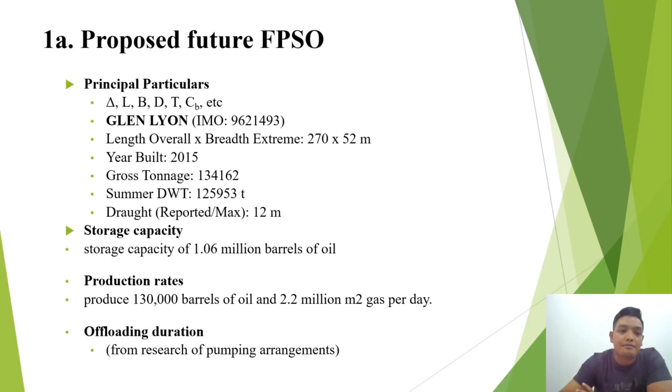Glen Lyon FPSO is operating on the field located 175 km west of Shetland Island in Block 204 and 205 of the UK continental shelf, with an export route for the charter tanker to the refinery or shore oil tank storage. The field, also known as the Schiehallion Field, was discovered in 1993. Recoverable oil reserves of Schiehallion are estimated to be between 450 to 600 million barrels.

The climate of the North Sea is strongly influenced by the inflow of water from the Atlantic Ocean and strong westerly wind. The North Sea is characterized by large variation in wind speed and direction, high level of cloud cover and high precipitation. There's a max temperature of 17 degrees and the lowest minimum temperature of 6 degrees in the North Sea.

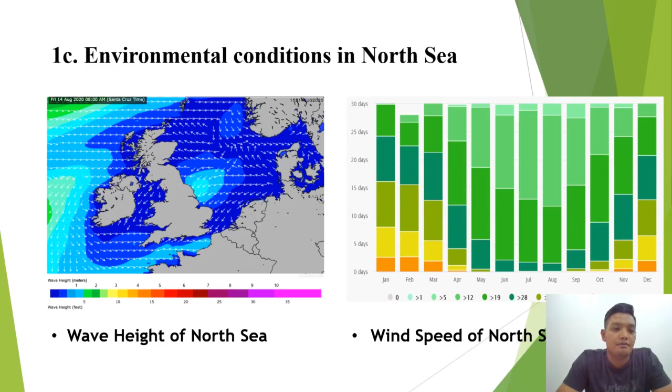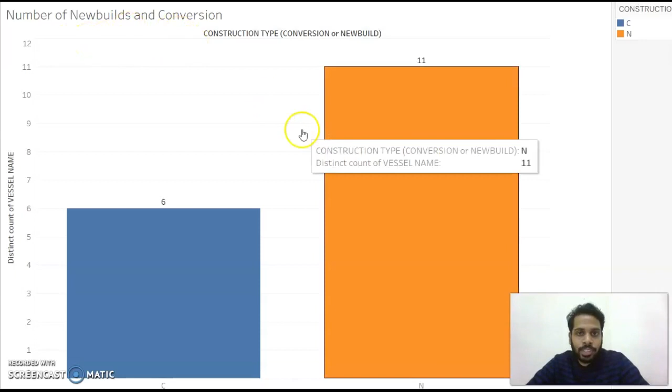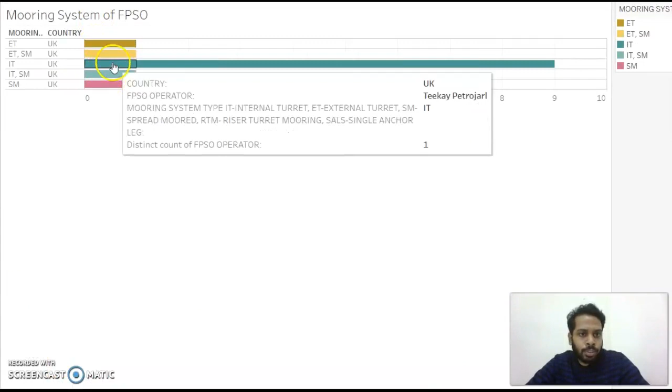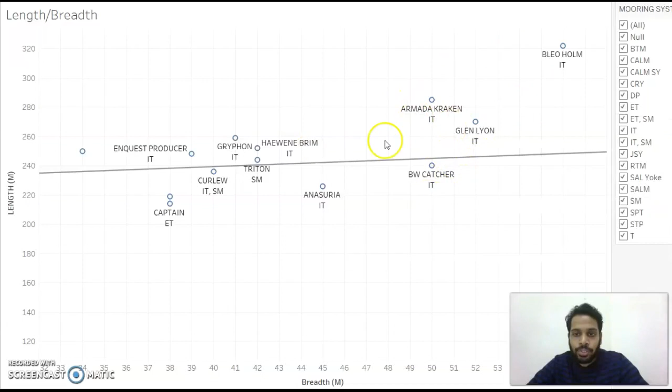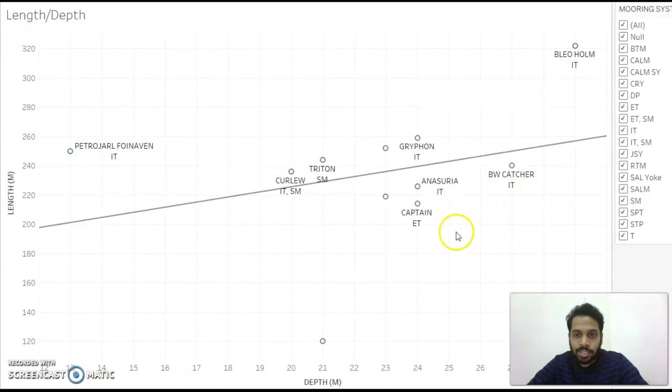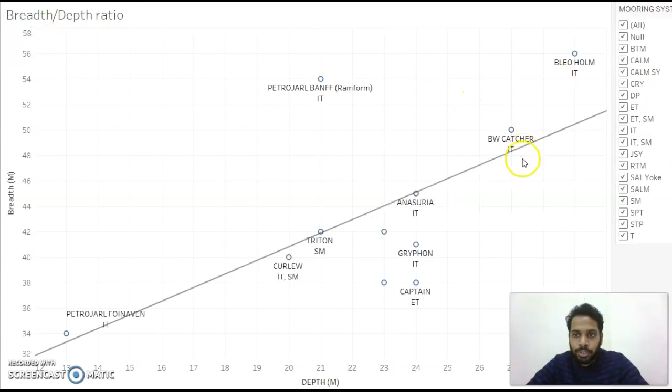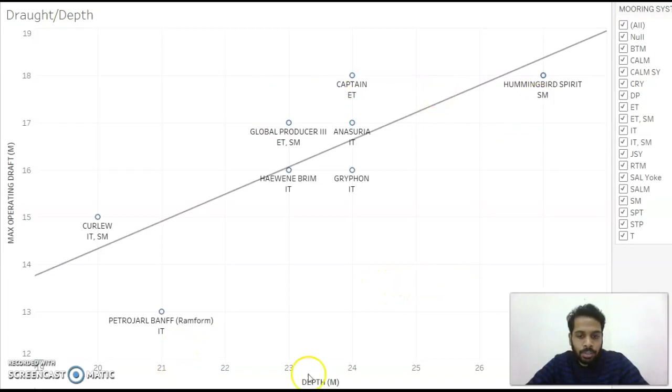Okay, this is the length and breadth of each FPSO in the North Sea, and this would be the length and depth of the FPSOs existing in the North Sea, and this is the breadth and depth ratio of the same FPSO ships. So the last one is the draft and depth of the FPSO ships existing in the North Sea. So that's all for this video.

Okay, thank you. Hi, today I want to present the criteria for the selection of floating production system, why we are choosing this monohull and why we need to carry out the model test. The monohull and semi-submersible come in water depth up to 3,000 meters, and the spar and tension leg platform are 1,200 meter depth and 1,500 meter depth.

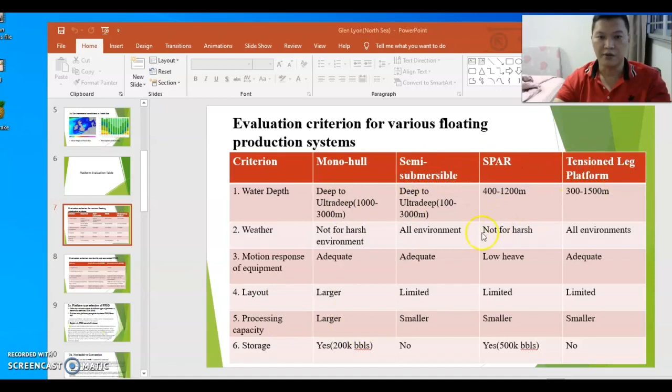Come to layout and processing capacity. The monohull is larger compared with the semi-submersible, spar and tension leg platform. The physical shape of future production facilities in the North Sea appears to be to a larger extent monohull. Floating production systems are intensively used nowadays for both shallow and deep water developments and are being actively considered in ultra-deep water applications greater than 1,500 meters. So the monohulls are the most popular concept, with larger production capacity, operating in deep to ultra-deep water and larger processing capacity.

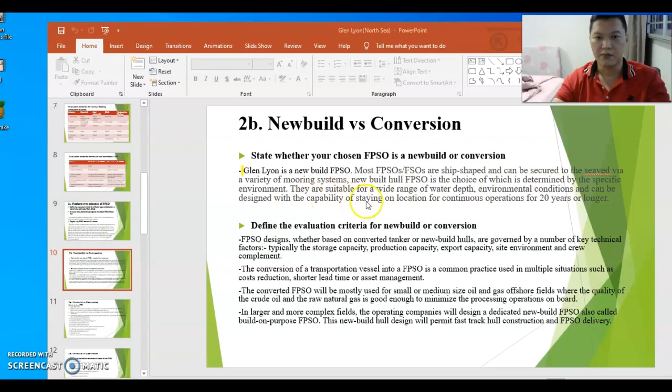The Glen Lyon is one of the new build hull FPSOs. Most FPSOs are ship-shaped and can be secured to the seabed via a variety of mooring systems. The new build hull FPSO is the choice, which is determined by the specific environment. They are suitable for a wide range of water depths and environmental conditions, and can be designed with the capability of staying on location for continuous operation for 20 years or longer.

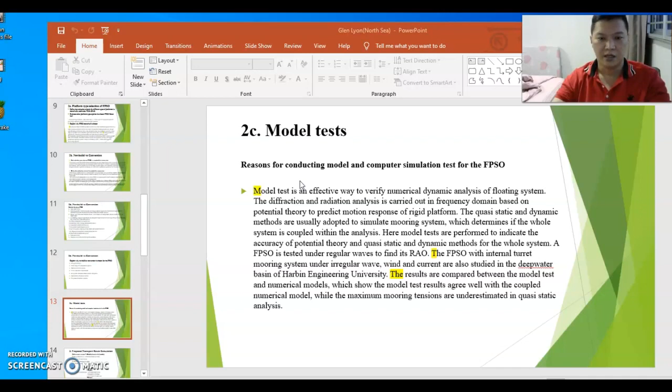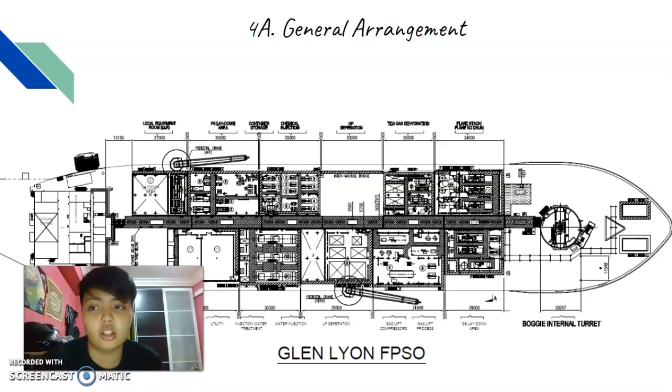This is a general arrangement for Glen Lyon FPSO. It is built to produce 130,000 barrels per day, and also is built to defy harsh environment. One thing special about this FPSO is using a bogie internal turret. As for proposed topside production, it has storage, and risers and wellheads are connected at the center point of the turret so that the ship can weathervane to withstand wind, waves, and current.

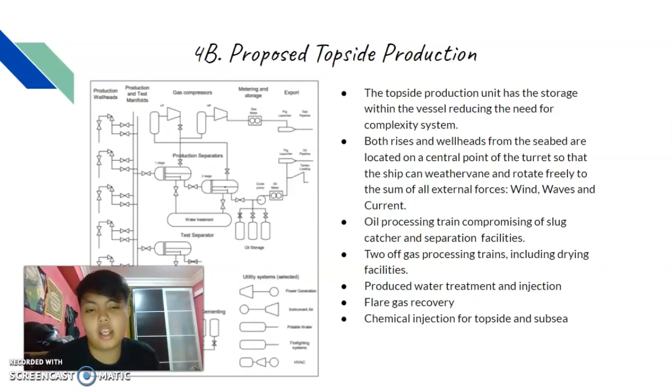They also have all the normal things that FPSOs have, such as an oil processing train comprising a slug catcher, drying facilities, produced water treatment, flare gas recovery, etc. For the offloading, the crude oil is transferred through pipeline onto the shuttle tanker storage and pipelines heading to Rotterdam, and gas is transported to Sullom Voe terminal via pipeline.

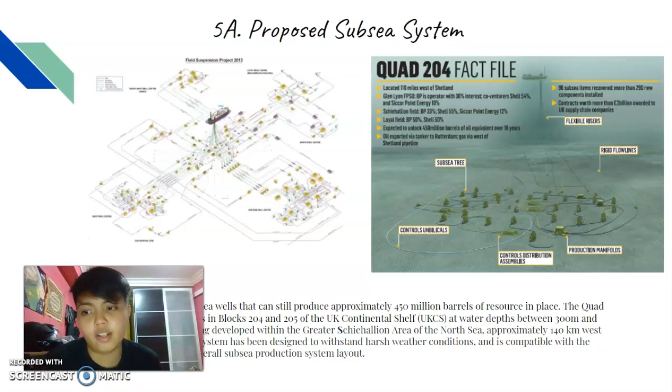For proposed subsea system, this field has a total of 54 subsea wells, and they just added about 20 wells in Quad 204 and 205. For proposed mooring, they are using a bogie turret in the forward part of the vessel. They have a swivel deck, manifolds, and mooring lines, and they also use S-type flexible risers.

For proposed riser, they are using an umbilical that uses electric and hydraulic control and is used for emergency shut off, for the smallest diameter riser. They also have 24 risers with compliant wave or lazy S shape, and umbilical, and the mooring system. This arrangement is to prepare for the harsh environment, and they use Technip services to deliver the largest riser system. That's all I have.